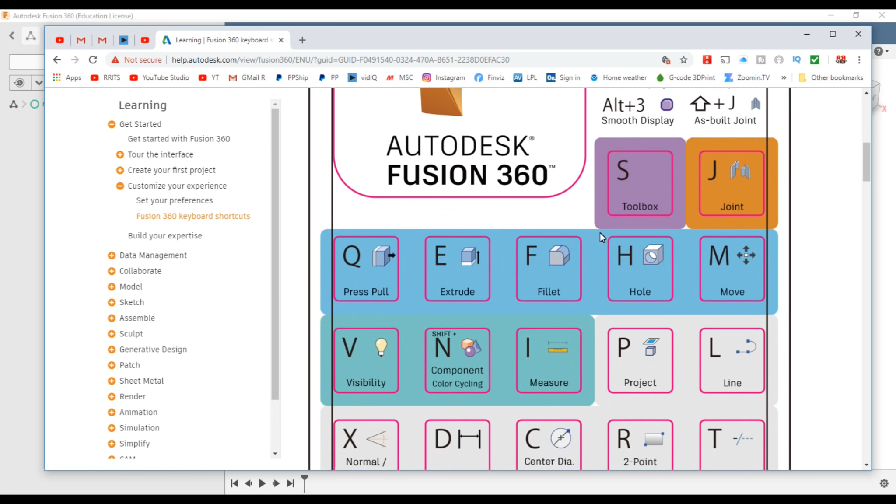One other thing to check out is go to the Fusion website and type in keyboard shortcut PDF and print this out. This is keyboard shortcuts, it's 4 pages, and it shows you a lot of hand shortcuts on the keyboard that really speed up the drawing of things. So go through and print this and have that handy, it can really help you out.

I have a copy sitting right here. Now, I don't use all these shortcuts, that's for sure, and some of them I don't know what they do, I'll be honest with you. But I do use quite a few, so it really helps. So print that out.

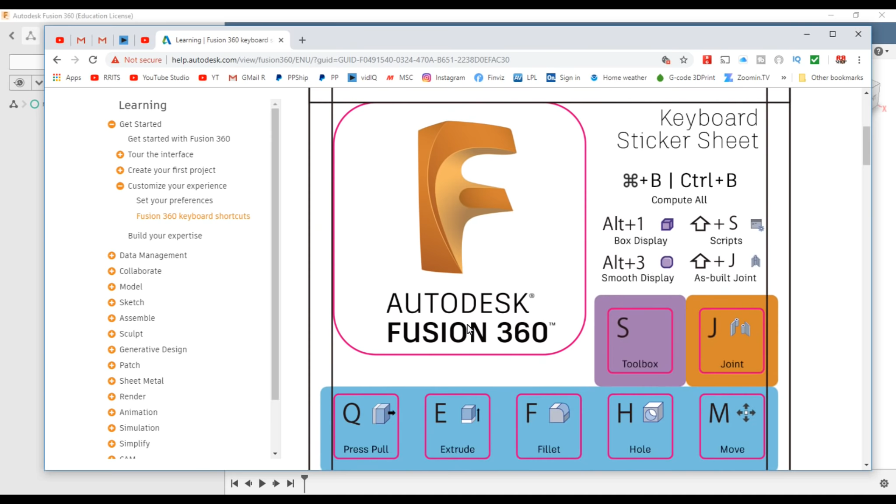Okay, let's get started on actually drawing something. So right off the bat, we start off with our untitled drawing, and we're going to save it.

What do you guys want to call it? Let's call it the Fusion engine. So that's going to be the highest level of our drawing, the Fusion engine, and we're going to have quite a few parts to the engine, or we're going to call them components.

The first component we're going to start with will be called the base. So right off the bat, we want to make components right from the very beginning, and all the history will be contained for that piece, that one part or component, will all be contained within it. That way, as we go through, it's very important about the history thing. Maintaining your history at the bottom here, it will have the timeline, so you can go back and edit and make sure things are in the right order to complete your component.

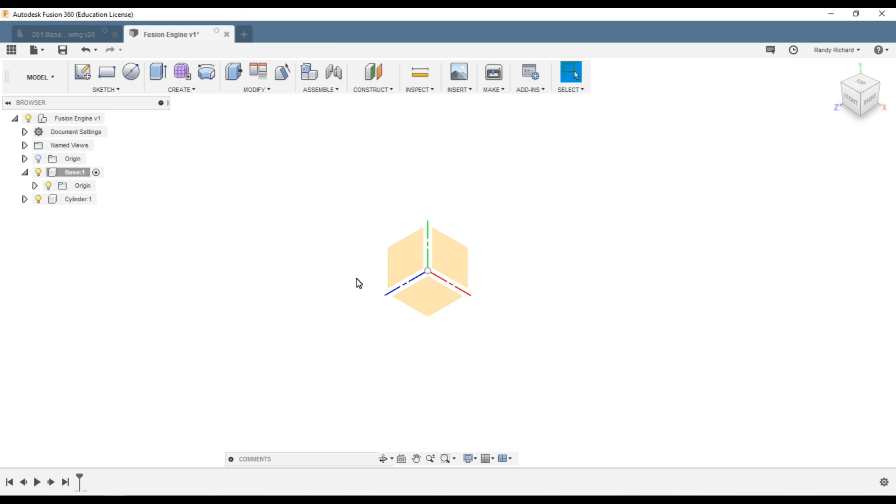I'll extrude into the Z plane, and it will work out in the total scheme of things. So we're just going to select the XY plane, and I'm going to right click on it and say create sketch. That's the fastest, easiest way to start a new sketch. You can use up here, sketch, create sketch, and hunt for all the other commands. All these commands have shortcuts, and we're going to learn to use shortcuts. They're much quicker. It's just easier in the beginning to start right off with the fastest and easiest way.

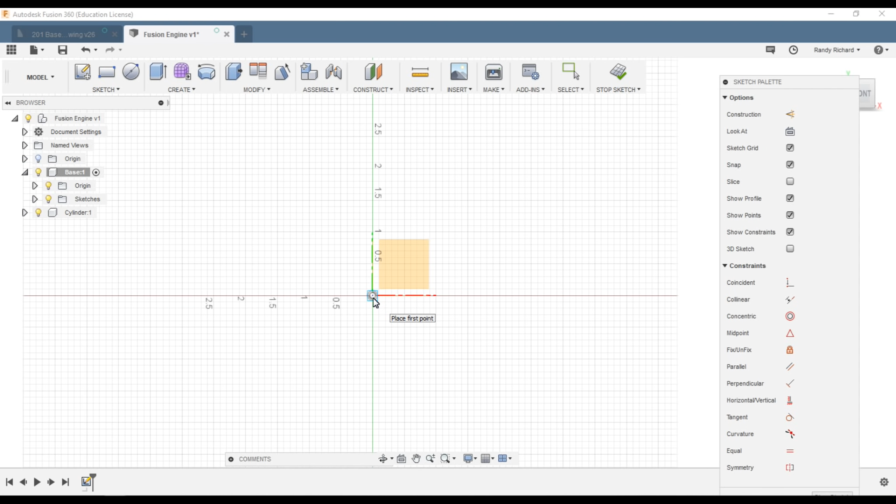All right, so first off we're going to do a line. We're going to start a line right in the center. So we hit L for line, and I have the little squiggly line on my cursor telling me what command I'm at, and it says first point. Click in the center. I'm just going to draw a vertical line, and as you can see as I move it, it kind of catches on that axis there, or down on this axis.

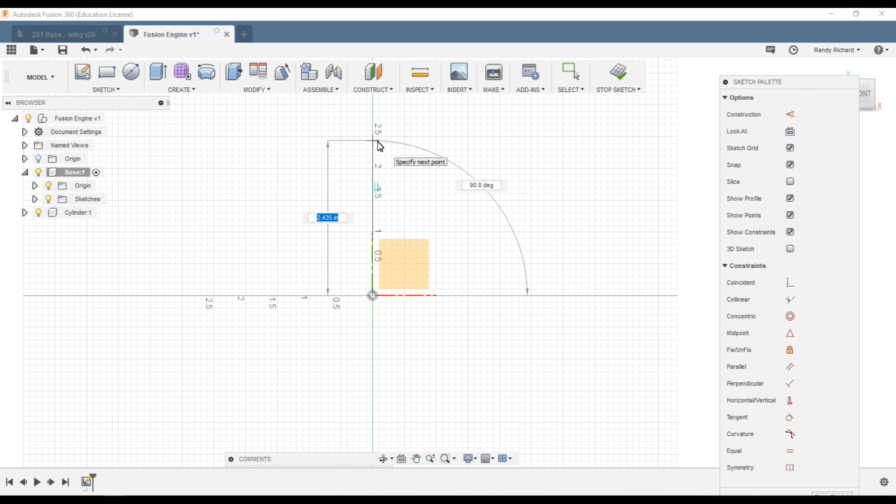And that's because you're passing through basically a constraint, but that way it helps you if you want to draw this at 90 degrees. And I'm just going to click there. It doesn't matter, and you'll see here it wants to draw another line, and if I hit escape, it ends the command. The length of this line doesn't matter. It's going to be the side of our base.

We're going to draw the end profile of the base first, and this will be a reference side. So we're going to put it right on the axis. So now we're going to draw some more lines, and we're not going to care about the angles or about their lengths or anything, because as we go through and dimension it and complete the sketch, we're going to go through many features, for the learning experience, you can say.

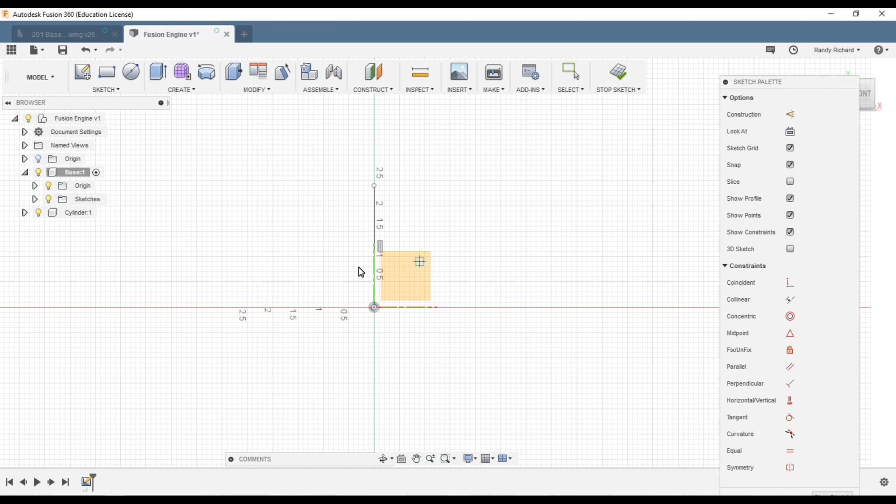So we're going to hit line again. We're going to draw another line across the base, and this, boom, whatever it is, right? And then the base has angled sides on the bottom. We're going to put an angled side. It comes over here, it goes up here, it goes over to this line here because we said that's a reference line, and we can say escape.

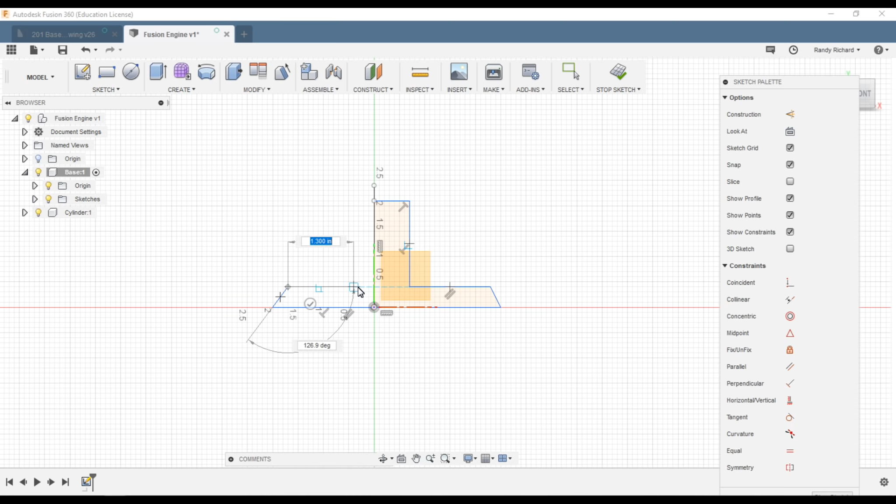And we can start down here. We can do the same thing, angle line, and if I touch that line and draw over, it will help me make that the same height as that line, right? And then I come over to this line like that. So there's the basic shape form of our base.

Now this line here is a reference line. It needs to be the same height as this, but we see it extends. There's a nice little command called trim, T, and the part we're going to trim will turn red if we select that part. We're going to trim, so select that one and just click your mouse and it's gone. All right, so let's trim one other line. The bottom of this line goes down here, and we don't want that, so we trim that out.

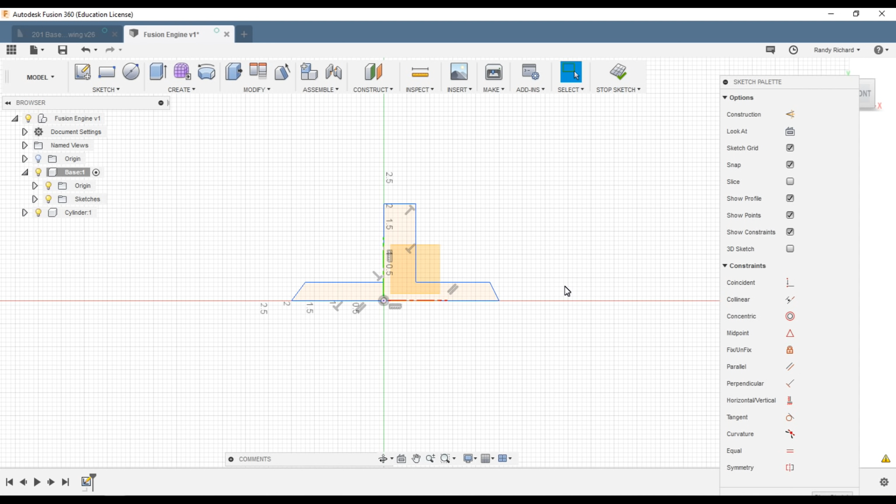So now we have our basic profile of our base. We're also going to add a reference line that's important a little farther down the line here, but we're going to put it in now because it makes it a little easier so we can make this symmetrical and such. So as we zoom in here, let's put it this way: as you go across this line, you see it forms a triangle. That's marking the center of that line, or the midpoint.

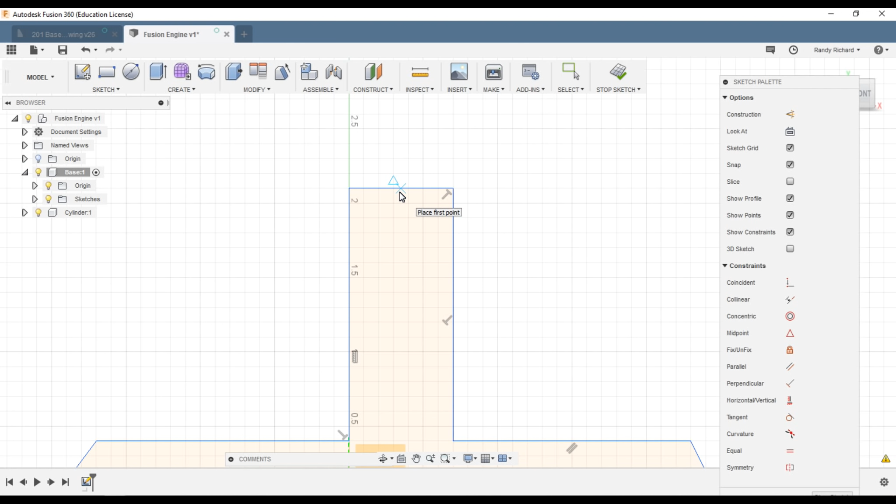Make the line somewhere outside of that midpoint, just anywhere, but not on the midpoint. And then we're going to make that a line. We're going to select it and hit X, and that makes it a construction line. The construction line will not affect forming the body. It's just for referencing.

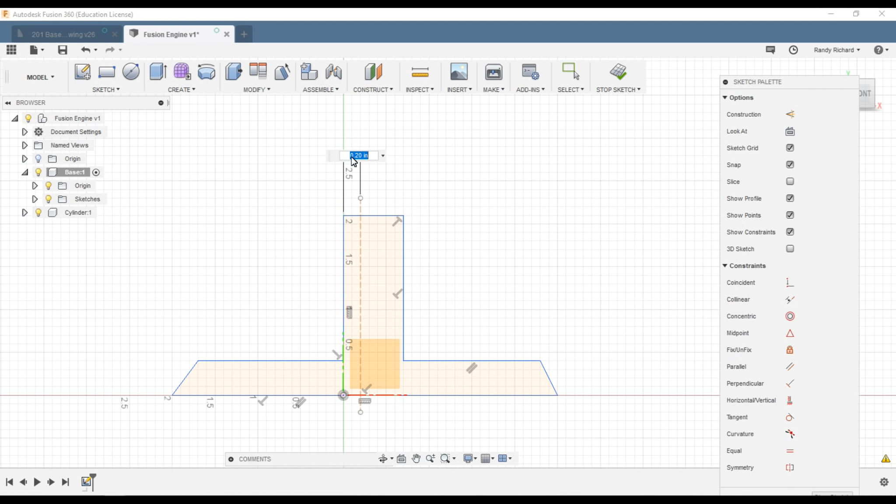We're going to hit D for dimension, select this line and this line, and give it a dimension. It's 0.225 inches from this other reference. So this is a reference, and this will be a reference. But this also starts to form our dimensions for the whole base.

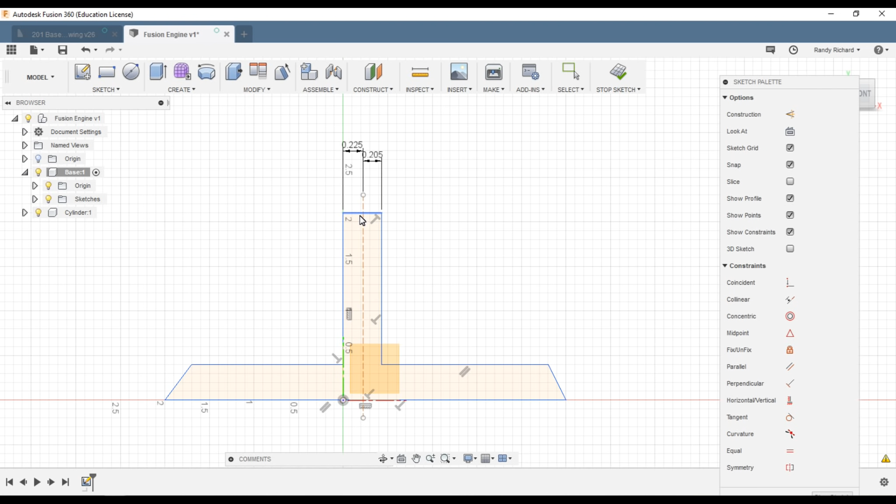The next dimension here from our reference line, construction line, to this side is 0.205. Now you see how it's going to start to form up here. The dimension from the top to the bottom is, oh it's already there, 2.1 inches. What luck, there we go.

Dimensions for an angle. This angle to here, just hit D for dimension and select those two, and it comes up with an angle. So it knows it's at an angle already, and it's going to be 60 degrees. Now if you don't want it to sit in your picture or frame, you can drag that down here if you want.

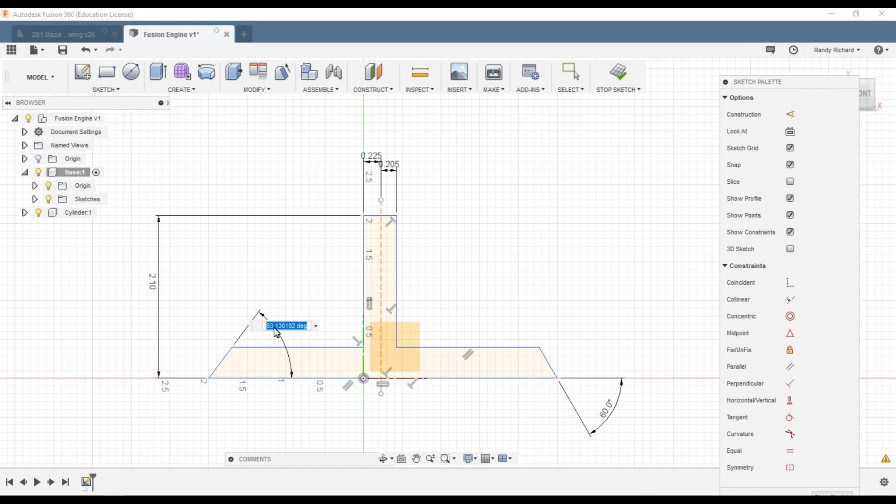And we're going to make this one the same, 60 degrees. I'm going to drag it down here.

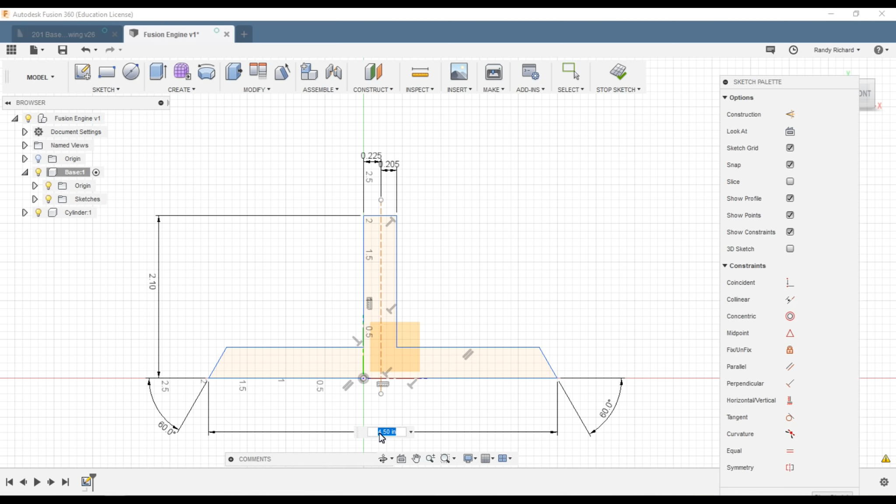Now, symmetry on this is we're going to center it around the construction line, the dimension line we drew, for symmetry of the base. So the dimension of the baseline, though, is not 4.5 inches, it's 3 inches. Now that didn't work out too good, right?

But if we go over here to symmetry constraint, click on that, click on this point and this point, and then we click on this to be symmetry around that. We all shifted, but we lost our position. We don't have our origin back on this line, our axis.

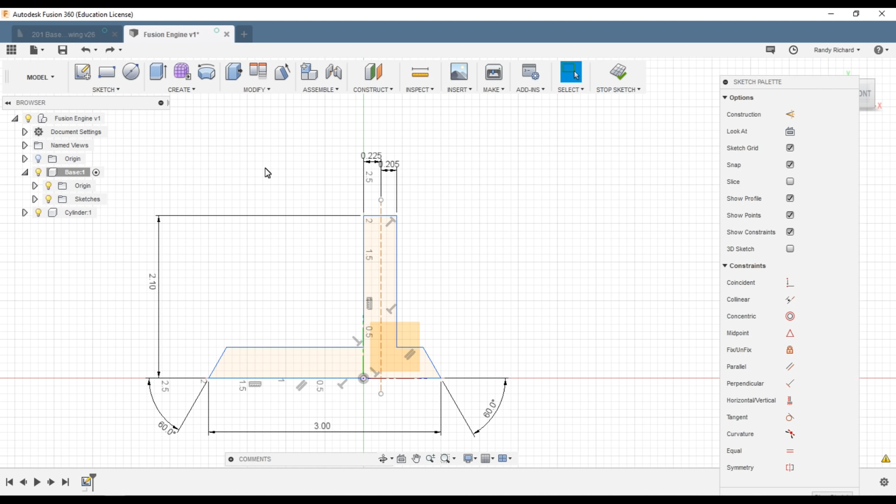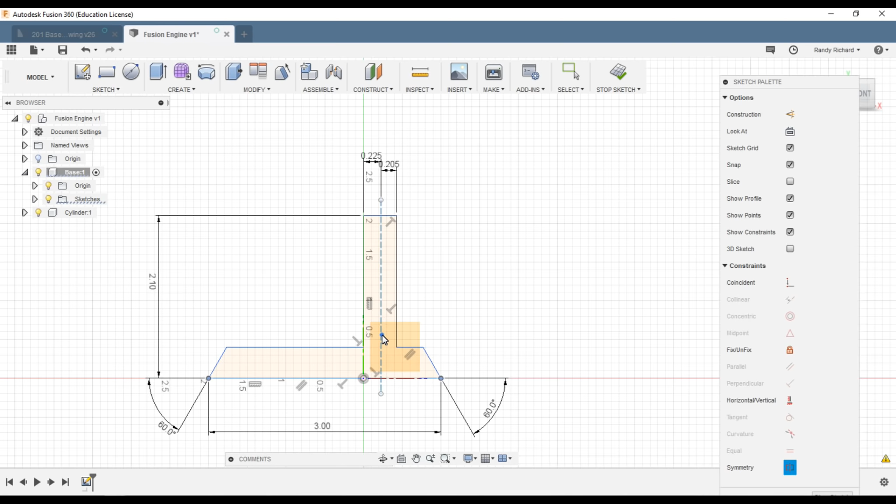So that's really not what we wanted to do, right? So we can go back, and we're going to use this fix feature. We're going to click on fix, say fix this line, and we're going to say fix this line. So I don't want them moving because they're references. Hit escape, and now we'll go back and do the symmetry here and here around this, and everything shifted in the direction we wanted it to shift.

Now we're looking really, really good. The only dimension I don't have is the dimension from base to here, dimension here to here, and that's going to be 0.3. And this side also.

Okay, now I had to put in 2 dimensions, and it'd be nice if you didn't have to do that. So if we take that, we're going to get rid of the back up here a spot. I could just say that this line here, this line, and this line are collinear.

This line and this line are collinear, and then I don't need to see it. I use that collinear constraint right here, as you see here. These are all these little constraints showing up, and now I only have to put in the 1 dimension. So if I put in 0.4, they both go up and down, right?

You want to try to, I don't know if you want to try to use as few or as little. The more dimensions you use, the more it's constrained, type of thing. But all these little symbols you see are constraints.

So here we use the symmetry constraint telling us those 2 points will be symmetrical around this line. We have parallel constraints - this line here will be parallel with this line. These little T looking things are 90 degree or perpendicular constraints. That corner will be perpendicular, which will make this corner perpendicular.

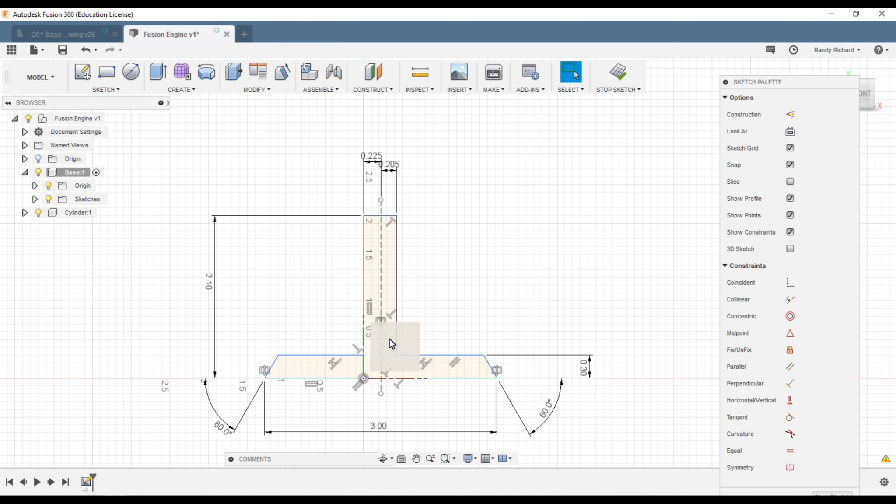And this line is said to be vertical, that's what that is, and this one's horizontal. So this is really a fully constrained sketch, even though the lines are to turn black when it's fully constrained enough to make a body, but these are still blue. But I know it's okay to make a body here. I'm not sure what's missing, put it that way.

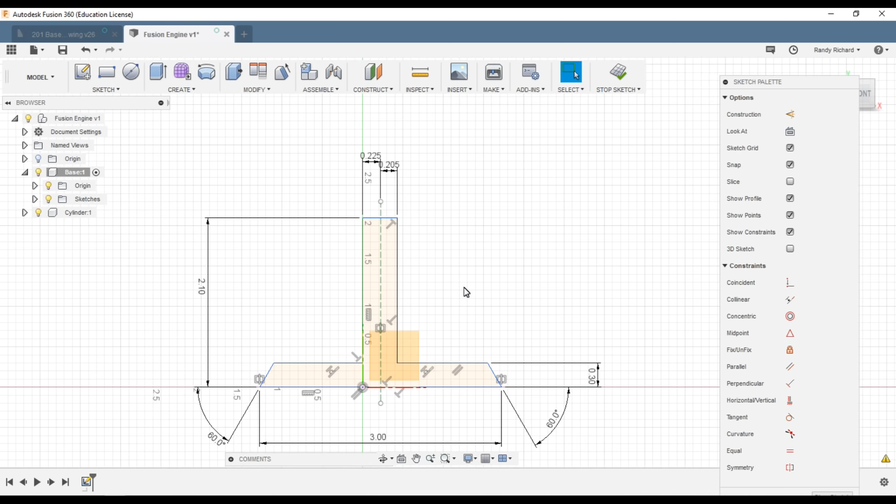You can see how this is a light color. It also turns blue when I select it. It's enough to form a body. So we're going to say stop sketch.

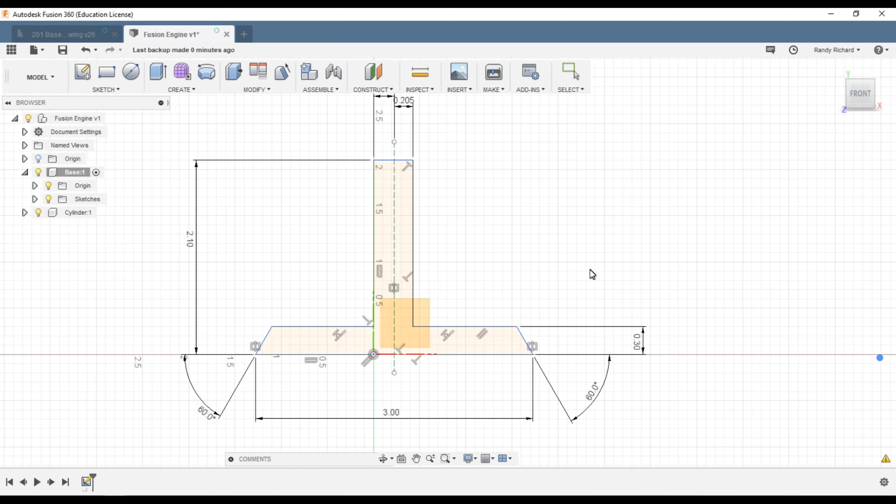We're going to back up a second. I'm going to go down here. You can see our history forming, and I'm going to say edit feature. Okay, one other thing we're going to do is we're going to do an F command, which is fillet, and I want to do it in the sketch command, let's do it within sketch.

Sketch here, fillet. And right here, these 2 corners need fillets. So we're going to click on that corner and make it a 0.25 fillet, or it's like that. Put in the dimension, and we're there.

You can see that. Now I'm not going to do it on this side. I'm going to show you one other method to put in those fillets. So we'll say stop sketch.

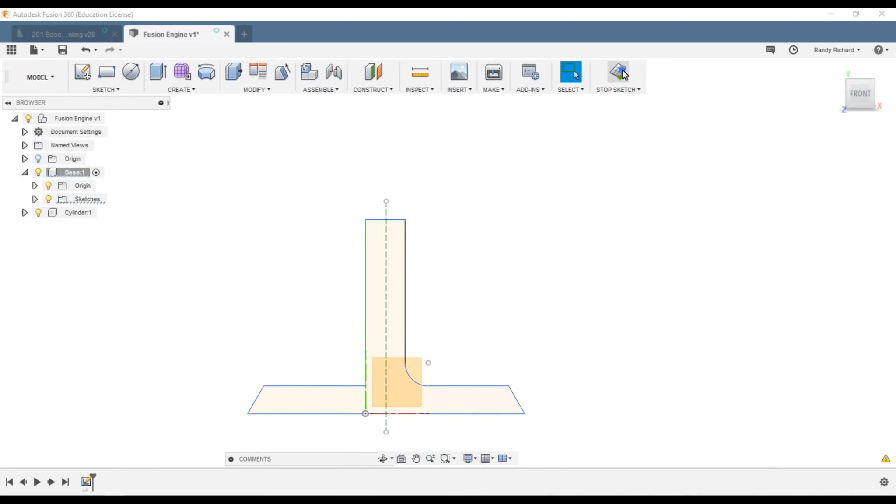And that's what we have. It's in one plane, two-dimensional drawing. Now if you hit Q, that's press pull, and we select the feature.

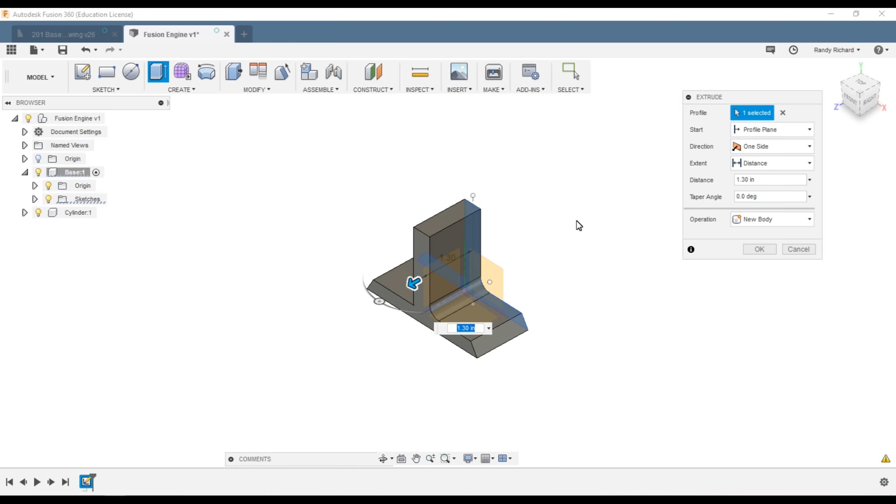And then we can drag it and extrude it out. It's also called extruding, as the command box says, extrude, and we're going to punch in 4.188 as the dimension. There we have our first body formed.

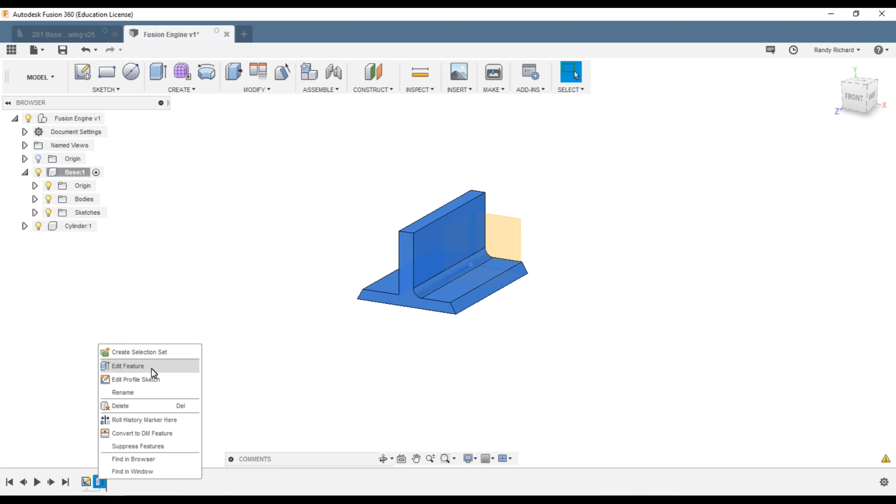And if you go back, you can go back here and say edit feature if you wanted to change something, where he says new body. The distance was the one way, and we typed in our distance, and we started on a profile plane.

Now, many of these little boxes that jump up all have a lot of options, and I'll try to explain what most of the things are.

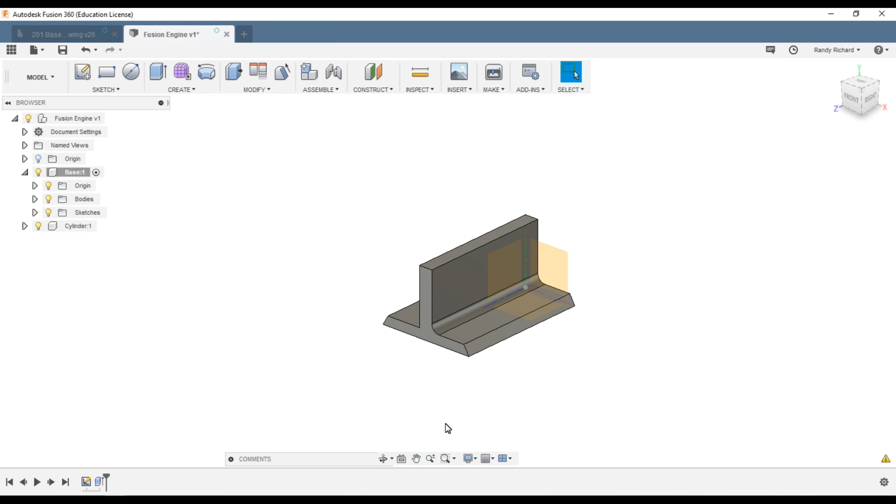So let's go in. I said we could do a fillet a different way after the body's formed. You can go here, modify or fillet, or press F, and we select that edge we want to fillet, and we can just type in 0.25 and form the same fillet. A different way to do it.

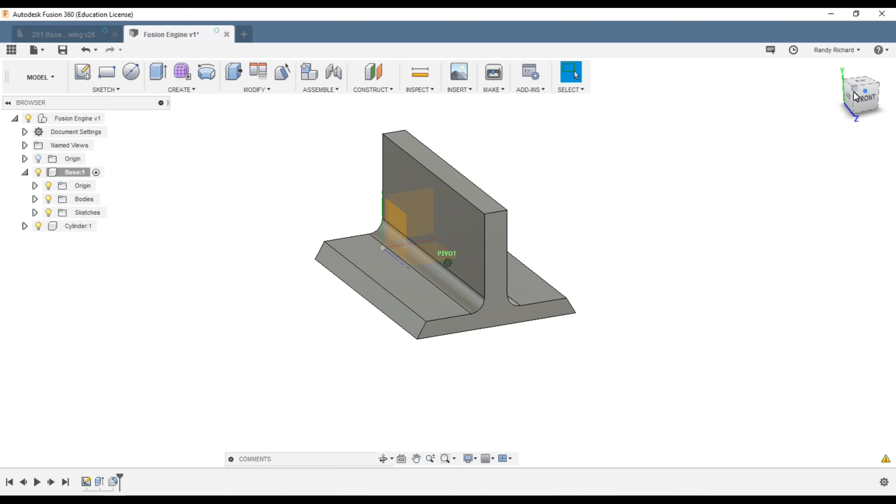All right, now we need to form the pad for the cylinder, which is on this side. So we're going to right. There's a couple ways we can do it. We can draw the feature on this side, or we can draw the feature on this side.

If we draw the feature on the end plane, it will make it easier to dimension because of the dimension that they have for it. It's from the reference plane. You gotta remember that this side is the reference side, the reference plane.

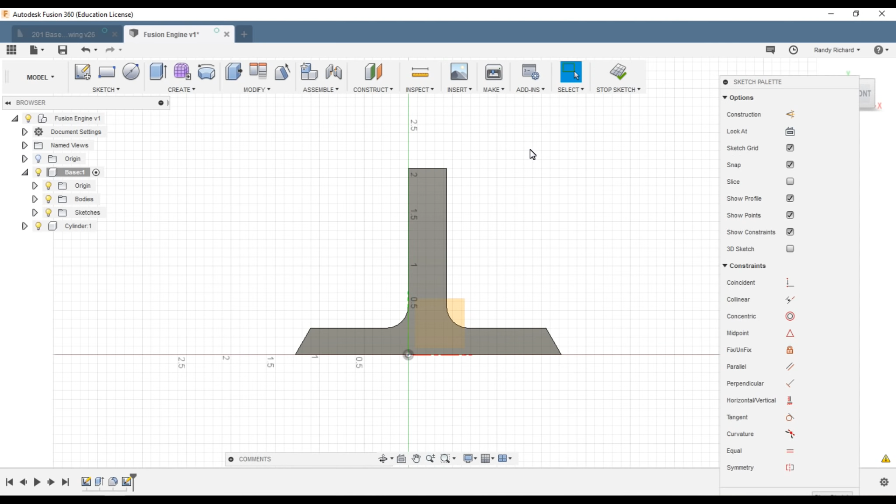So we're just going to right click on the end, create sketch, and we're going to draw a rectangle. R for rectangle, or 2-point rectangle, and I'm just going to draw it in here. It doesn't have to be attached. I'm going to have it the same height, I think. I'm just going to draw this rectangle in here.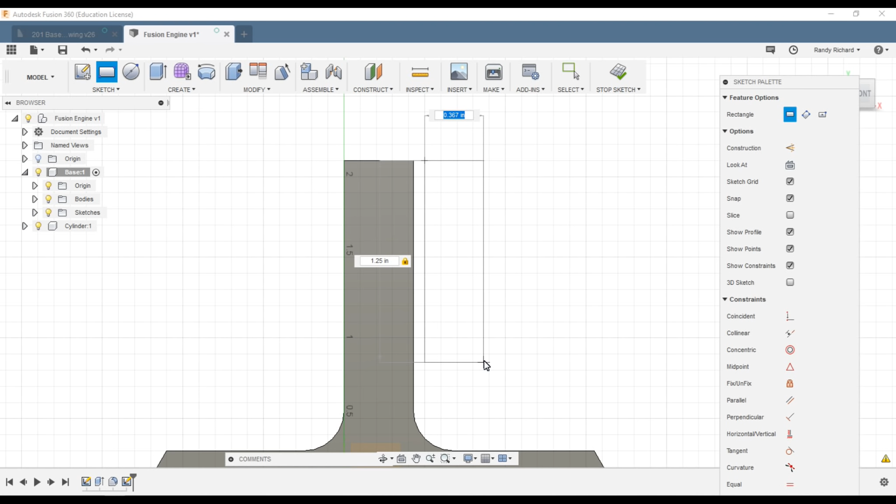Now I know it has to be 1.25 inches tall. Now the top is where the cursor is, the blue highlighted dimension, and I don't care what that dimension is right now. So I hit tab and I can jump to the other dimension, 1.25. I know that one, and I'll say enter.

And now I've drawn a rectangle, but it's not attached or anything. It's not really fully dimensioned and all that. It has some constraints for vertical and horizontal. Well, I want this to be attached to this.

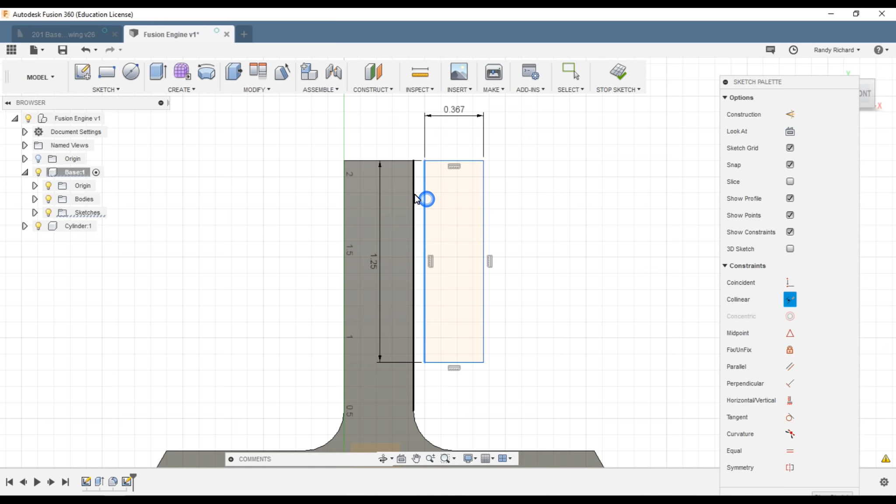So I can say collinear, and boom, there. Now that's attached. And now you see how Fusion formed a constraint line here. This is a referencing constraint that it formed. So it knows that now it's attached.

Well, this dimension up also on the top now is not right. So we're going to delete that dimension and say D for dimension. And from here to this side is supposed to be 0.6. Now that's set for that dimension, and it also created more reference points and reference lines.

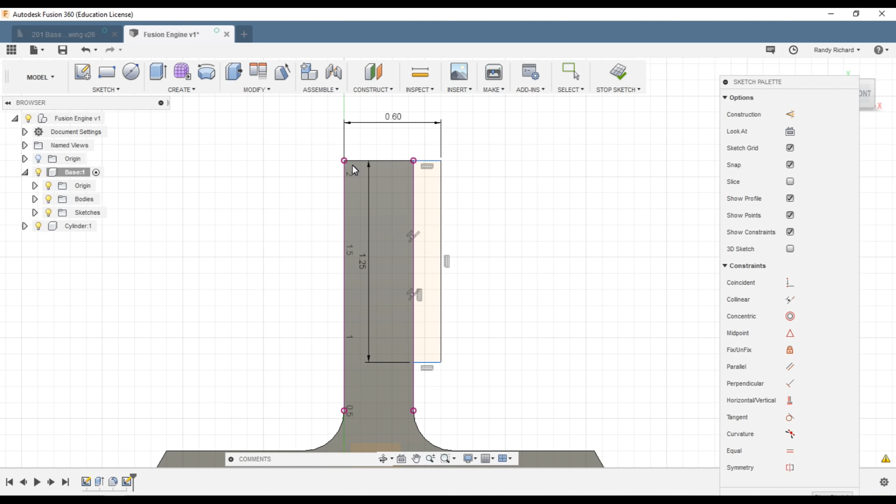I've formed my pad for the cylinder. I have my height, I have my width set from the proper reference location. We can say stop sketch.

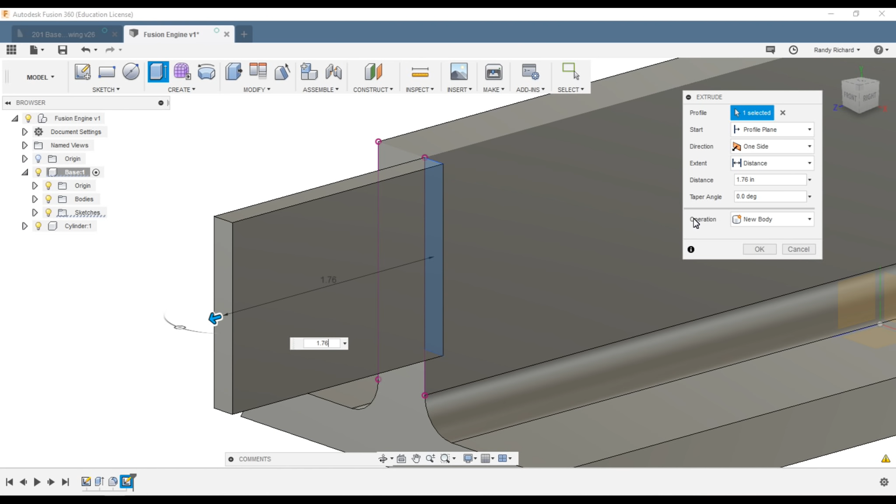We can say Q or extrude. Q works good, and we're going to go down here 1.76, I think it is. Whoops, wrong way, change the sign of the dimension. Say OK. There's the pad is formed.

Now we need to put a hole in here and a counter bore. So let's just right click on that, create sketch. We're going to do this over and over and over again. Select a surface, create a sketch.

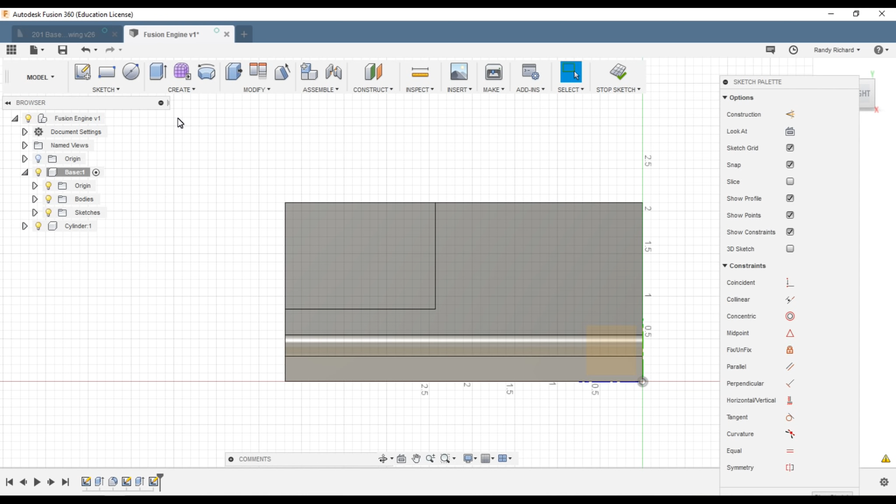We're going to go C for circle, and we're just going to put a circle on here. I don't care where, I'm just going to put it on here. But I do know the diameter, so I'm going to put it in now, so I don't have to go back.

0.7. And we're going to D for dimension. From the center to here, we select, and it's going to be 1.5. And dimension from the end in is 0.869.

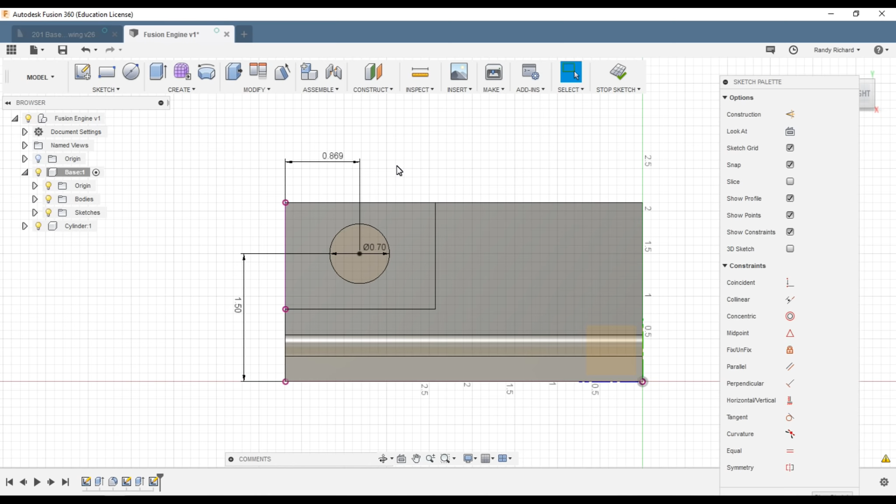And you'll see more constraints are being formed from Fusion itself, which are fine. These are all good. Stop the sketch, and we'll do the extrude right now. We just keep doing this over and over again, and minus 1.5 to make it cut into the surface. There we go.

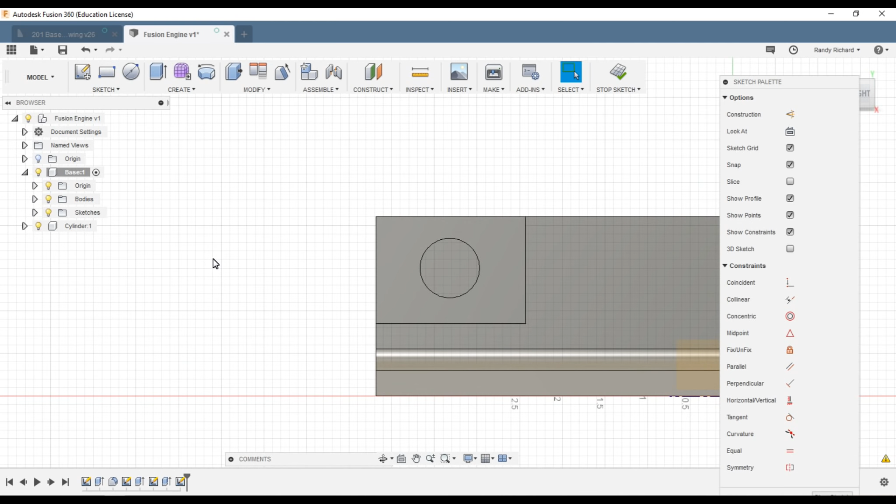Pretty simple, right? Now we need a bore put in here. We're going to select that surface, right click, extrude. We'll do a circle, touch that, and we should get the center point. I didn't know why it's not coming up with the center, but it doesn't really matter, we can just put it anywhere. It's 0.3125 for this bore.

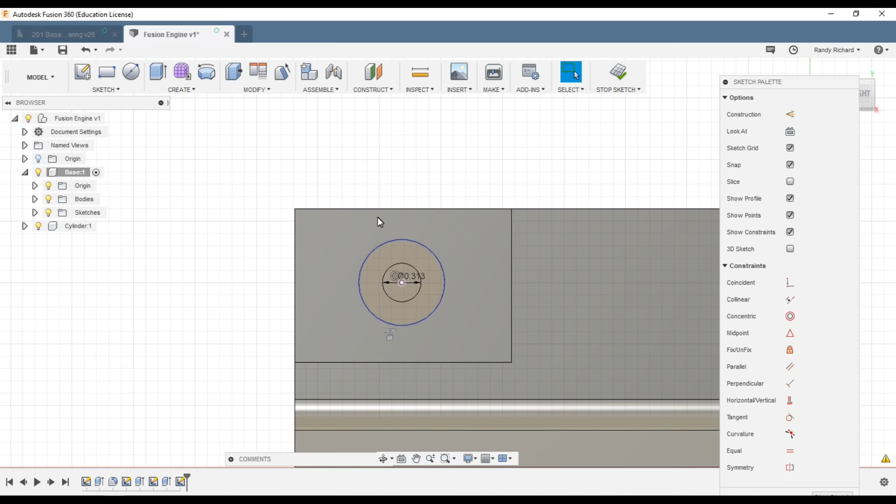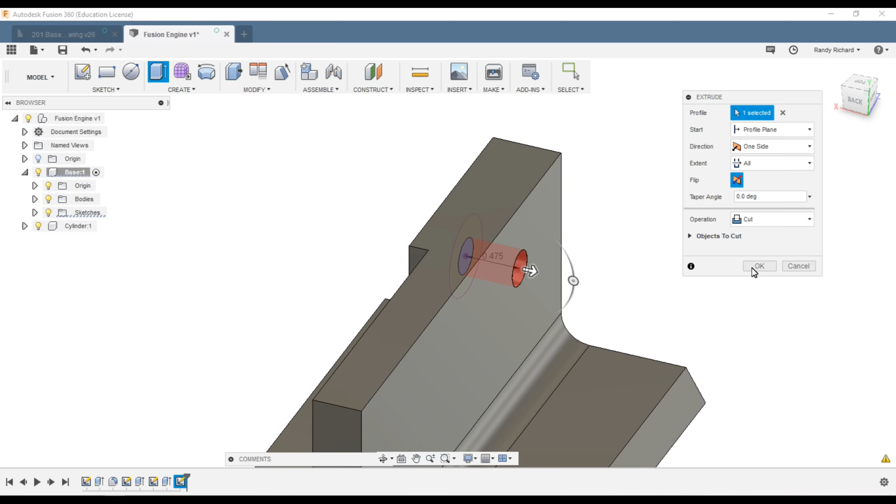We can go over here to concentric, select that circle and select that circle, and now they're concentric. Stop sketch, and we can do a press pull again. Select that, and we want it through here, right? Now we're going to say through all, so we're not referenced and stuck on that one surface. If we drew something else out here, it would pass through it, and that's what we would want. It's a cut to cut through the material.

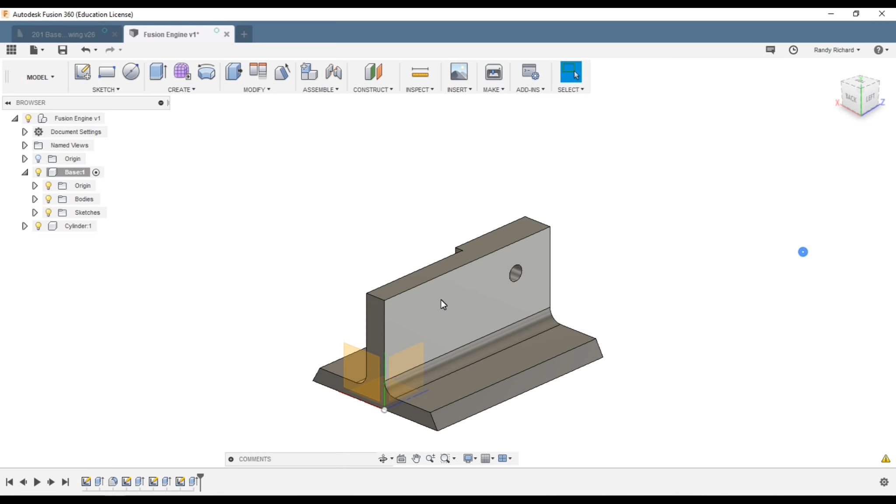There, now we have our bore. Pretty cut and dry. Now there's some bosses - there's going to be a boss and a bore here, a boss here, and a boss here. Since this is our reference surface, we're going to draw the bosses on this side. I'm going to right click - oops, cancel, wrong one. Right click and create sketch.

Circle, boom, boom, we're just going to place our circle, and it's going to be 0.7. And we're going to make it concentric.

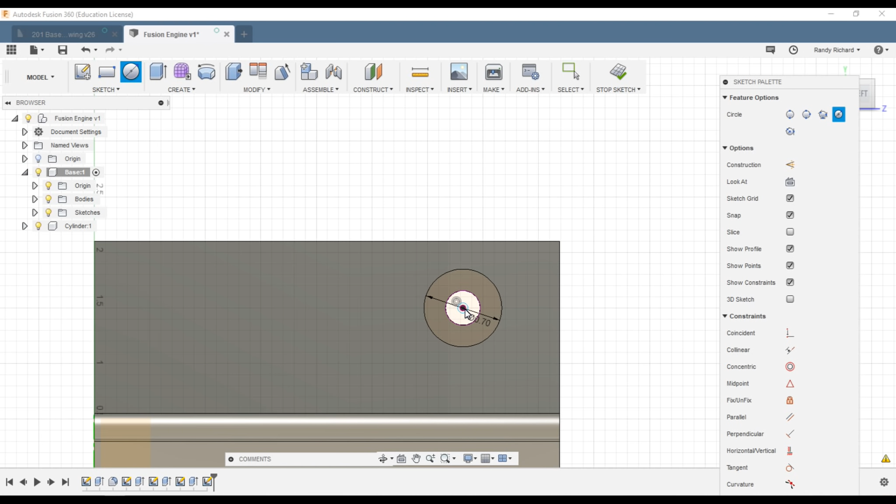We're going to place our, we are going to have another - we can do this all in one sketch if we want. So we're going to just kind of hover on there and get a line. Put a bore, 0.7, this is our boss. We're also going to do another circle in the center, 0.375. Now we have it all in one sketch.

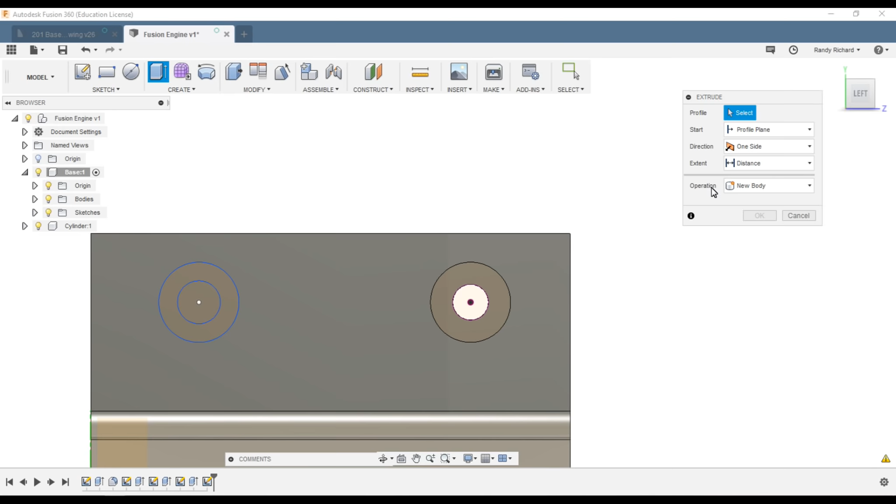Now we're going to stop sketch. Now we're going to do some extruding. We're going to extrude this one right here. As you can see, it's not selecting the center because I don't want the center either, I just want the outer part as the hub. 0.5, from that surface, from our reference surface.

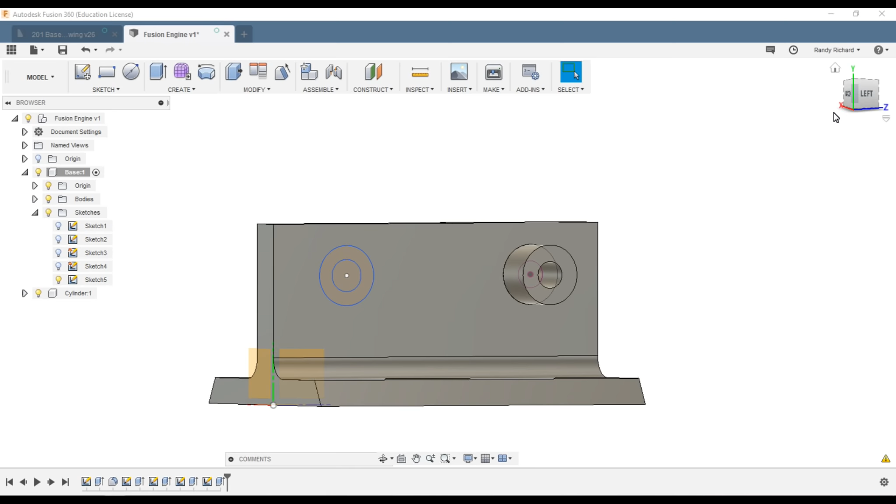Now when I did that, I lost the other sketch portions, right? So what we do is we just go up here to open our sketches and turn that sketch back on - all it does is turn it off automatically. And then we can do another extrude right here. We'll just do the ring for the boss, and that comes out how far? 0.130, not very much.

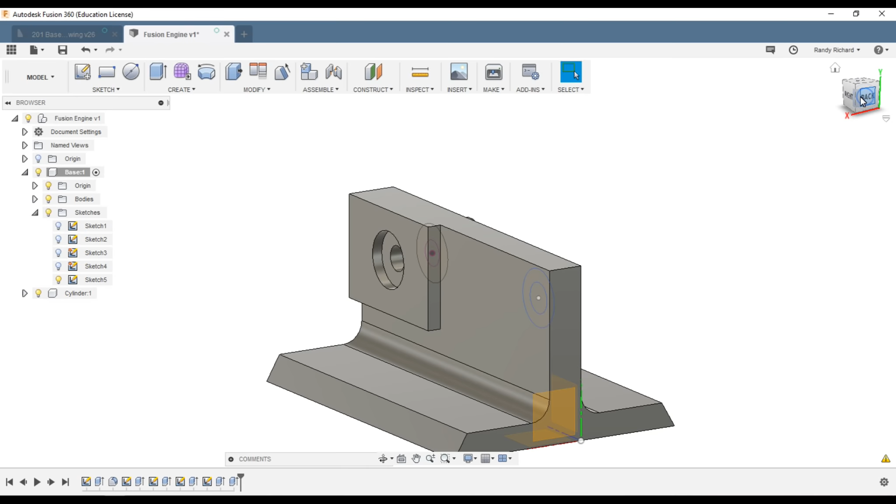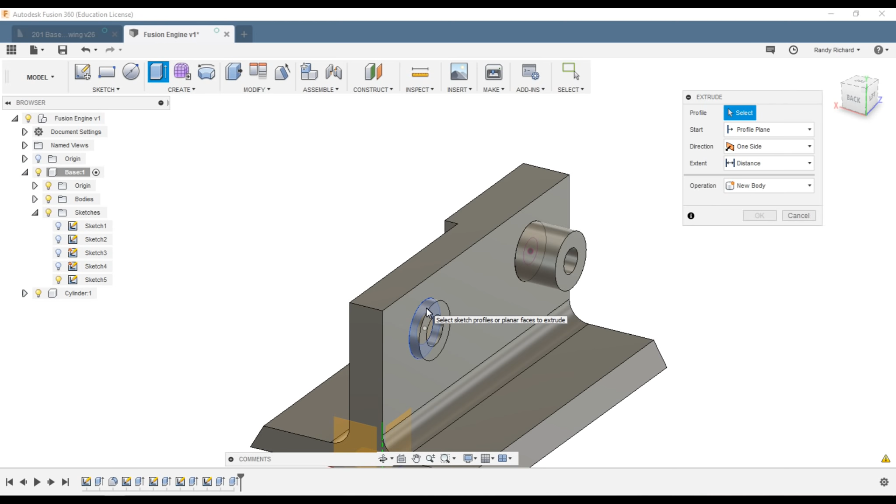Now the boss on the other side - I could come over here and draw that as a separate boss, or I can just use the boss or ring I drew on this side, because it's referenced from this surface, and I drew it on this surface for how far out it's going to stick, right? My drawing shows it's 0.772 from the end of the boss to this surface. So I can say extrude, select this ring, reach right through there and select that ring and take it out the other side, 0.772.

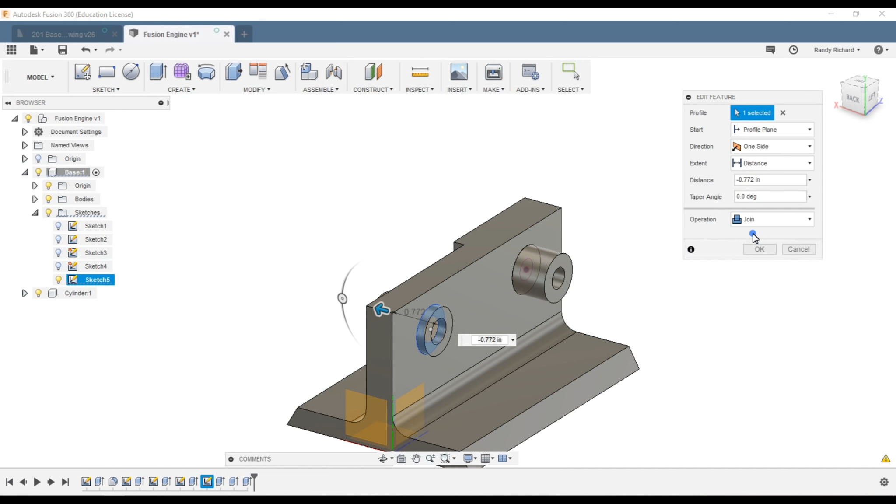Oops. I made it - I didn't change it to join, I had it as a cut. 0.772, there we go. Now I have my boss at the right length from the right reference surface, and it's all the same, all concentric and everything. I just don't have a hole in it.

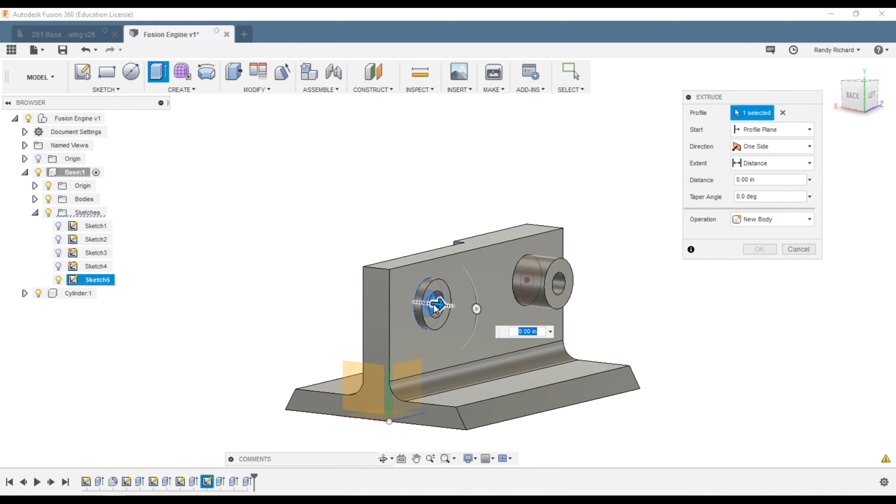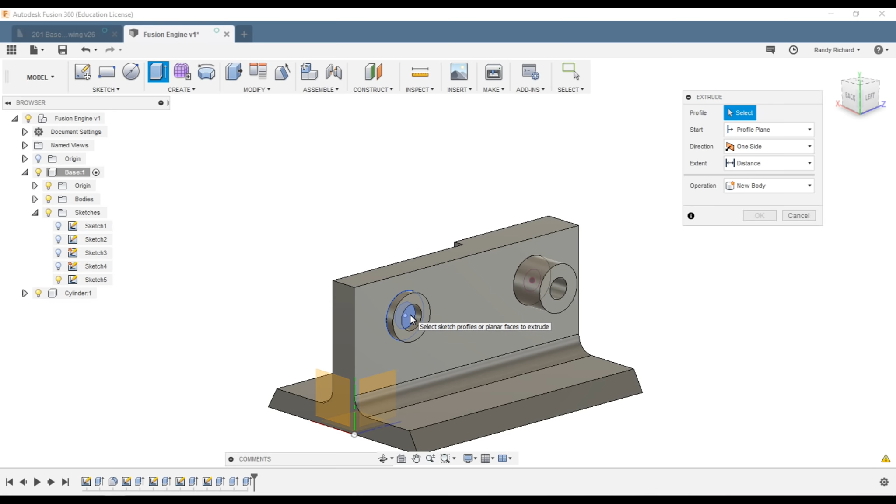So we can say extrude again, select the center - you'll see that it's just not, what's it put this way, the center is just not in the middle, just this part is solid. So really I don't have to extrude too much, do I? Because I didn't extrude it here and there. So we just hit extrude, select that, select this side as a cut, and I cut the center out.

Now I have all my bosses formed. So I think that will conclude this video so far, and we have the ports on the end to do. We have the ports on for the cylinder to do on this surface. We have profiling to put in over here, and we have some lettering to put on.